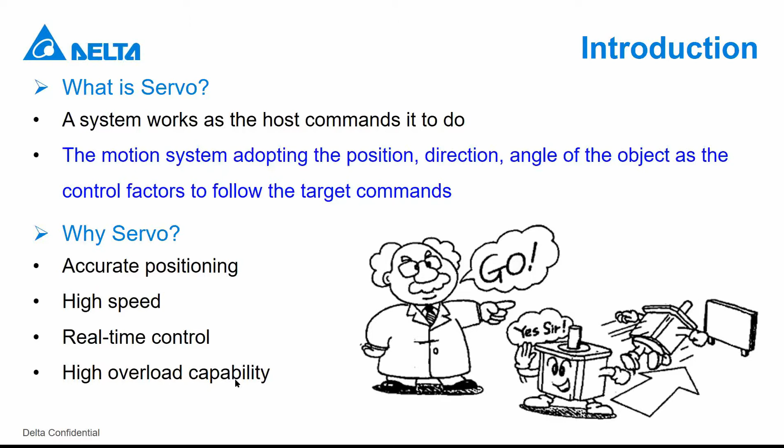Next, let's talk about the system structure inside the servo system. First of all, we need to have a servo drive, and then we need a servo motor with an encoder.

What the encoder works for, I will explain later. But basically, the encoder is a device used to transmit position feedback to the servo drive, so that the servo drive can identify which position the motor is at right now, and see if there's too much deviation that needs to be compensated, or if it's actually following the command quite well and just keep on going.

Then the next thing is that maybe we have something like a gearbox. A gearbox can help to generate more torque. So if we don't want to size up the motor, this could also be an option.

And then what we will also need is some accessories. We will need cables — here we have the encoder cable, which is connected to the encoder, and the power cable, which is connected from the main output of the servo drive to the motor. We will also have connectors for different terminals, for different purposes.

This is a very basic servo system structure. If we want to integrate it with more devices, we can have something like an I/O module, which we can use to wire digital or analog input/output. We can also have regenerative resistors, so that when the motor is braking, or if there's some unexpected high input power, it can be dissipated through this resistor.

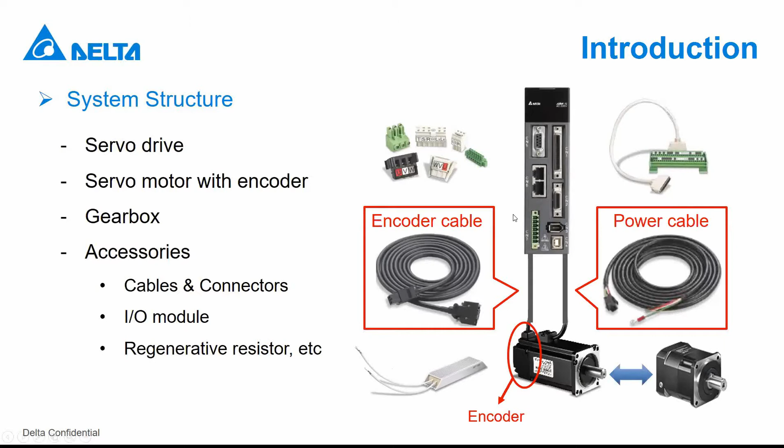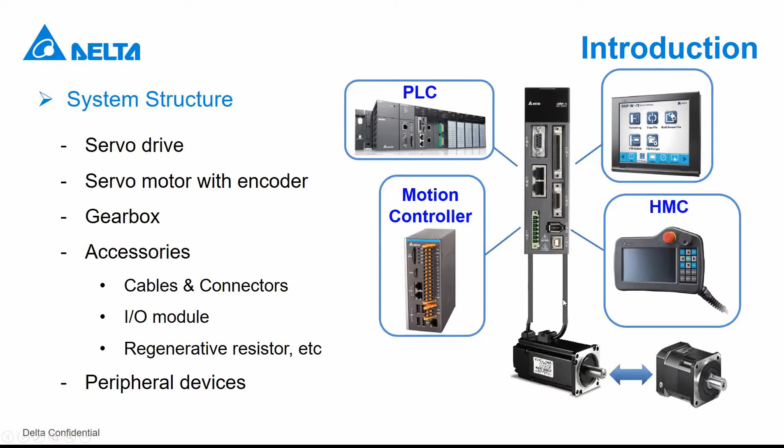With this set, we can move on further to peripheral devices, like connecting it to a PLC or motion controller, HMC — which is a human machine controller — and HMI, which I believe you're all familiar with. These can all be thought of as a host or master, sending commands to the servo drive. In this case, the servo drive works as a slave device — it receives the command and then runs the motor to the right position with the right speed.

If we move one more level further, we can see that we'll have a cabinet that combines all of the devices. Here we have an HMI, some PLC, and Ethernet switches, and they can communicate with the servo drive, sending commands via CANopen, Modbus, or something like EtherNet/IP — these are all possible options.

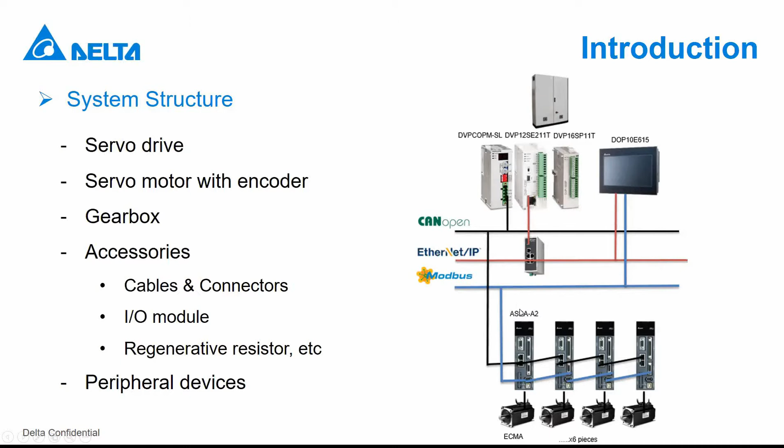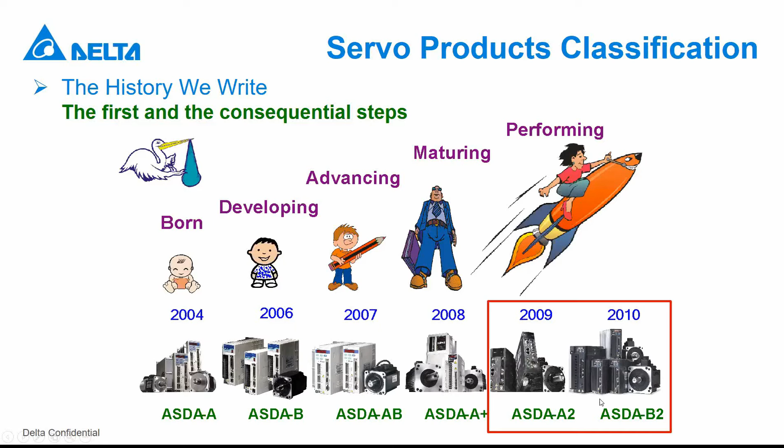So now let's move on to Delta servo products. As you can see, our very first series, ASDA-A, came out in 2004, and we kept on developing new series. Right now, the two series we're promoting are ASDA-A2 and ASDA-B2. This is the product hierarchy that we can see here.

We have a coordinate with the horizontal axis as the encoder resolution and the vertical axis as responsive ability. If we look at the two series we're mainly promoting, we can see that A2 falls in this part and B2 is a little bit lower.

So why do we want to use encoder resolution and responsive ability as the criteria to categorize our servo products? As I mentioned previously, there are two major advantages and purposes we want to achieve with servo products: accurate positioning and high speed.

For accurate positioning, as I mentioned, the encoder is a device used to read the feedback position and send it back to the servo drive. So the resolution of the encoder will directly affect how much and how well we can optimize the position.

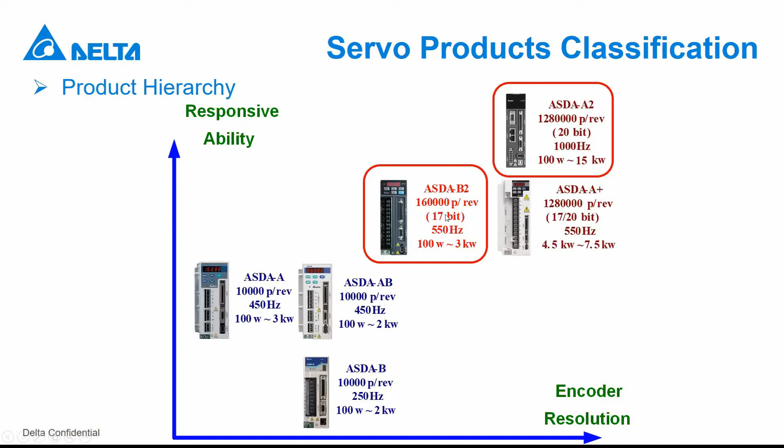As for A2, it supports a higher encoder resolution of 20-bit, and also higher bandwidth, reaching 1 kilohertz. For power ratings, it starts from 100 watts, the same as B2, but it can go up to 15 kilowatts. So basically it can easily be told that A2 is the series that is more advanced than B2.

Let's take a look at this table. This is how we classified our products. Right now, since we're mainly promoting A2 and B2, the rest we're either not promoting or they're already phased out, so we can just focus on these two series.

First of all is the input power. We have two series: 220 volts AC or 380. It's also common to hear people say we have a 200 volt series or 400 volt series, but basically it's the same.

For A2, it supports both input powers. If it's lower than 1.5 kilowatts, single phase or three phases is possible. But if the power rating is equal to or higher than 2 kilowatts, it has to be three phases. This is for 220. But for 380, it's mandatory to have three phases.

Then for encoder resolution, as you know already, it's 20-bit for A2. And for the bandwidth, it can go up to 1 kilohertz.

Then you can see the digital input/output and analog input/output set here, and then the pulse command frequency that the servo drive can identify. For open collector, this is the maximum it can support, and if it's LD, which is line driver, a differential signal, then we see it has a higher data transmission rate.

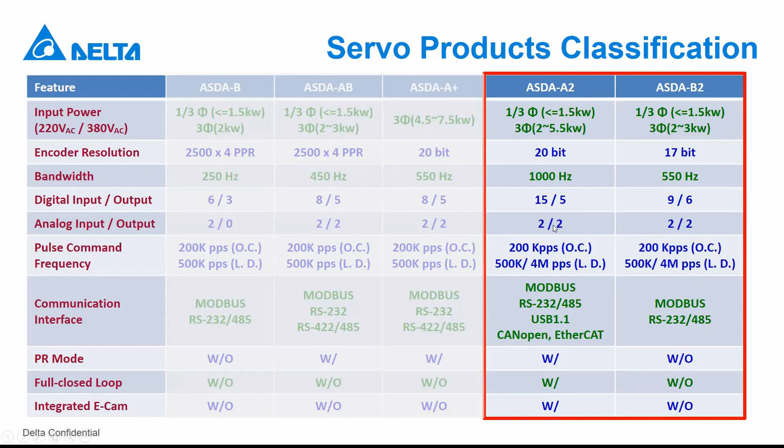As we can see, B2 doesn't come with these three built-in functions. It doesn't have PR mode, there's no full closed loop, and also there's no integrated ECAM in B2. So overall, A2 is the model which is more advanced, having more functions than B2. The next thing is what we can say is the major difference between A2 and B2.

The difference is that one has built-in motion function while the other doesn't. This one is B2. For B2, we need a higher level host controller, because the host controller needs to give it the sequence, tell the servo drive when it should execute which command, and also needs to create and program the command, so the servo drive can identify which profile it should carry out. All the motion and sequential commands need to come from the host controller. But what about A2?

For A2, because A2 itself has the capability to program different kinds of profile commands, even when we need a host controller, it just needs to switch between different commands to tell A2 which one to execute, and that will be enough. So only a lower level host controller is enough, because even if the host controller is not able to provide the profile command for A2 to execute, A2 is still able to program by itself. So the critical commands generated in the servo drive can be handled by itself, and this will improve the performance for the whole system.

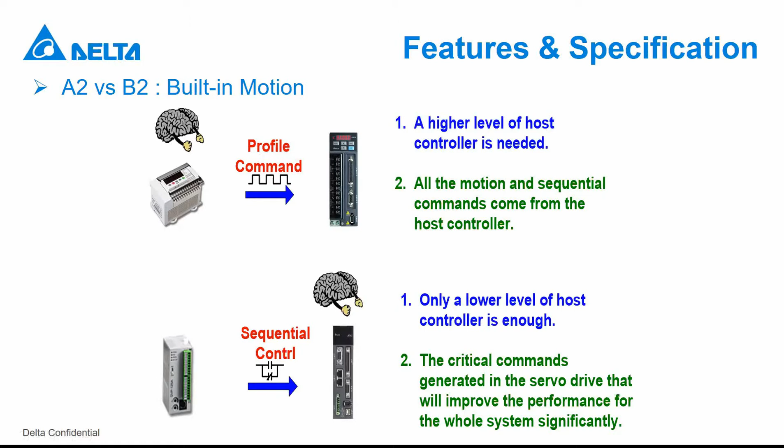Now let's talk about the main features of A2. The encoder resolution can reach 20 bits. It supports communication protocols like CANopen, DMCnet, and EtherCAT. CANopen and EtherCAT, I believe everyone is very familiar with, it's a very common and popular field bus protocol. What is DMCnet? DMCnet is a protocol developed by Delta itself, called the Delta Motion Control Network. Its transmission rate falls into the middle, but here we're mainly promoting the CANopen and EtherCAT type, which I will also mention later.

For A2, some specific models like A2U and A2E have extension digital inputs, so in total we can have 14 inputs. A2 comes with built-in motion function, also ECAM, and it can provide gantry control. The bandwidth can go up to 1 kilohertz, and we have some filters that help with resonance suppression using notch filters. We also have additional functions like friction compensation and bumping protection to optimize system behavior. We also have different operating modes, which we can briefly categorize into position, speed, and torque. Full closed loop control is another built-in function for A2.

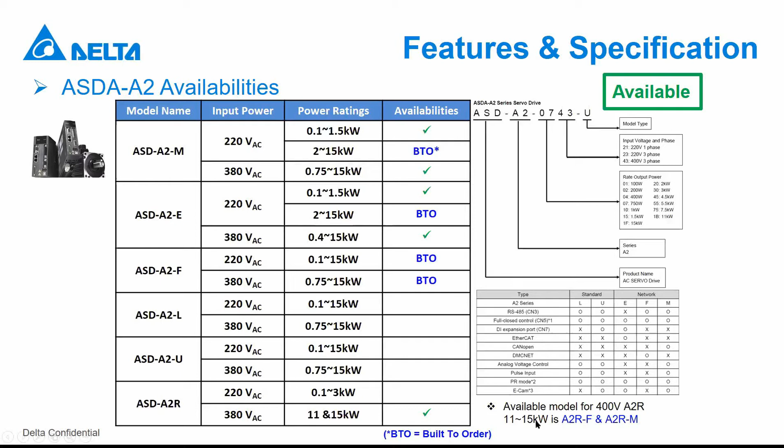Just one remark to let everyone know: as I mentioned, we have higher power ratings up to 15 kilowatts for A2. However, what we have is the ASD A2R, 11 or 15 kilowatts, not ASD A2. As you can see here, available model for 400 volts, A2R 11 and 15 kilowatts is A2R-F and A2R-M.

And then it's the rated output. And then a very important piece of info, which is the firmware version. Because for different models, like A2M, A2E, we have different firmware.

For different firmware, it means there are probably some different parameter configurations or settings. Sometimes when we encounter a problem in a certain model, it doesn't necessarily mean it will also happen in other models. If users encounter a problem but don't specify which model name it is, they only say 'I have a problem with A2' without specifying if it's A2M or A2E, then it could lead to misunderstanding because we don't know which firmware version you're talking about.

It will also cost time to communicate with users to understand the details, and that time consumed will not be efficient. So it's very important to know exactly which model name it is and which firmware version. The next one will be the serial number.

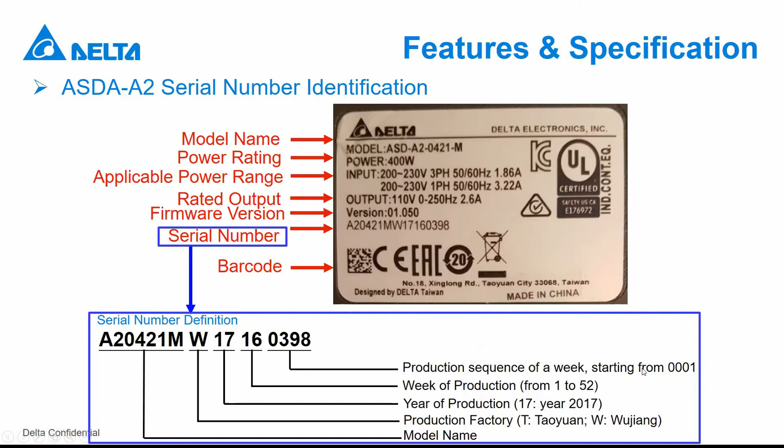CN2 is the connection terminal for the main encoder, and CN3 is for Modbus. For the last CN4, it's a USB to connect it to the PC, to use software to configure it. CN5 is another connector for the encoder. But why do we need two encoders? This is for the full closed loop, and I'll explain later.

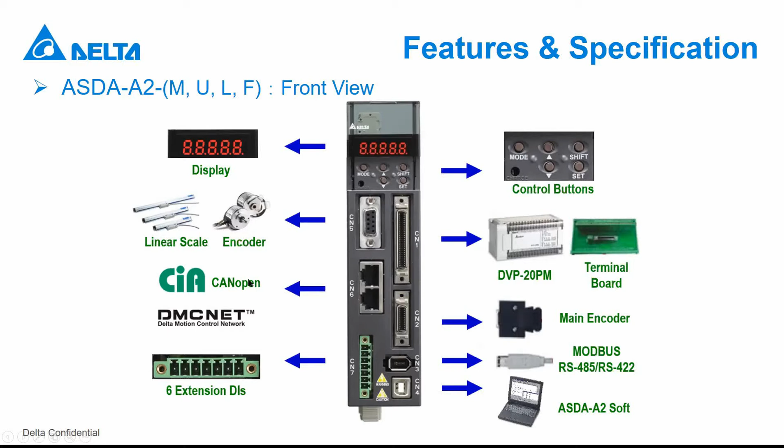For CN6, this is the communication port, so it could be either CANopen or DMCNET. The last one is the extension digital inputs, but as I mentioned, it's only limited to certain models.

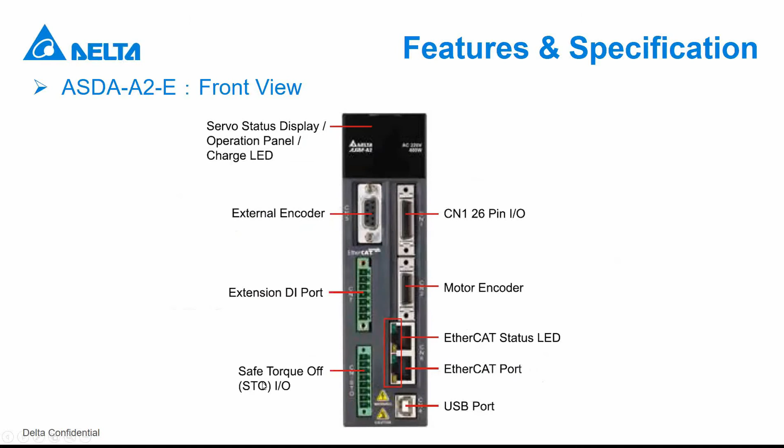If users want a servo drive with safety function, then for now their only option will be A2E. It's not possible to use A2M or other models to achieve that. Only A2E is possible to have the STO function.

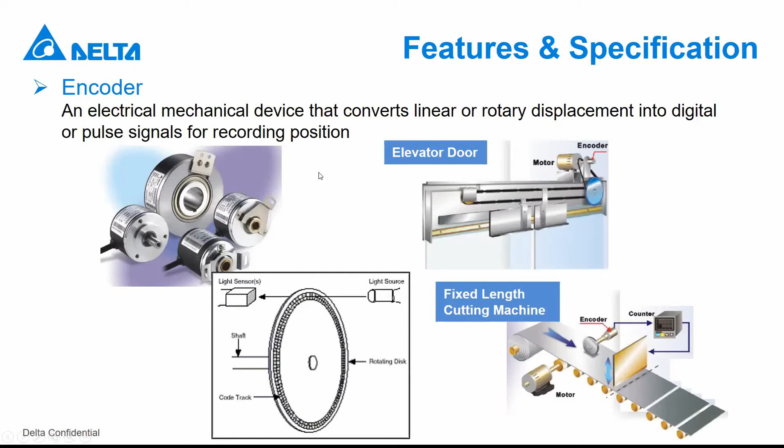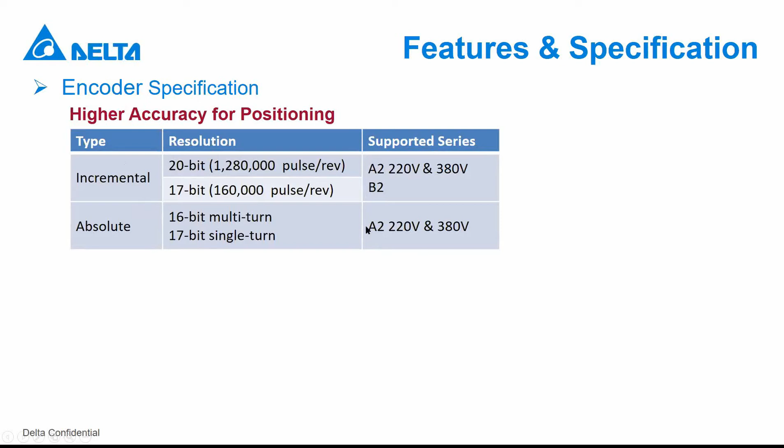So what is an absolute encoder? An absolute encoder is basically a kind of encoder that uses batteries to keep the feedback position from being lost due to power loss. As mentioned before, the encoder is a device that helps the servo drive understand which position it is. It can establish a coordinate and keep the record of the position.

However, this is only valid when the servo drive is in the power-on status. When the power is off and on again, basically the coordinate is lost and needs to be established again. There are tons of applications where this is not really acceptable, needing to reestablish the coordinate every time the power is on.

So in this case, what users can consider is using an absolute encoder. Because we have an additional battery, even when the servo drive is powered off, the position and coordinate can still be recorded with the help of this battery, so we don't have to do what we call homing to establish the coordinate again every time we power on. So this could be a very convenient selection, but it only supports A2.

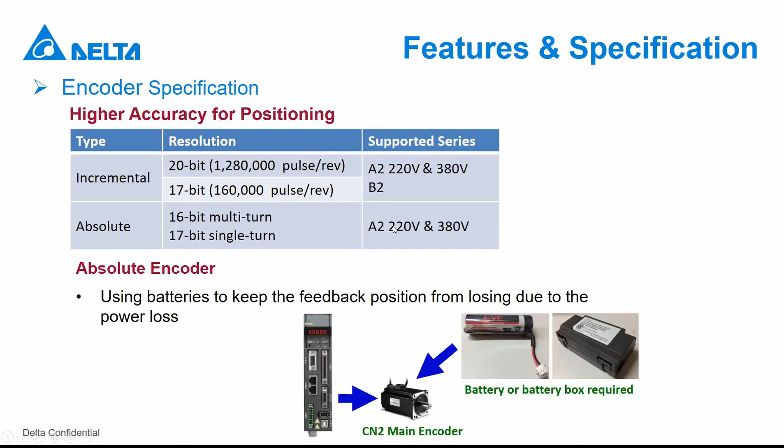For field bus, we support CANopen. Just so everyone knows, CANopen is a very common protocol, which we call DS301 or DS402, or you may hear people say CiA301 and CiA402. However, DMCnet, as mentioned, is a protocol developed by Delta ourselves, and it only complies with DS301, not DS402. So if there are requirements for CANopen with DS402, then we can only support and promote the A2M, not other products.

We also support EtherCAT, as mentioned, which is A2E, the EtherCAT type. It also supports the modes of DS402. What needs to be noted is that what we support is CoE, CANopen over EtherCAT, not SoE, not servo over EtherCAT. It's different stuff.

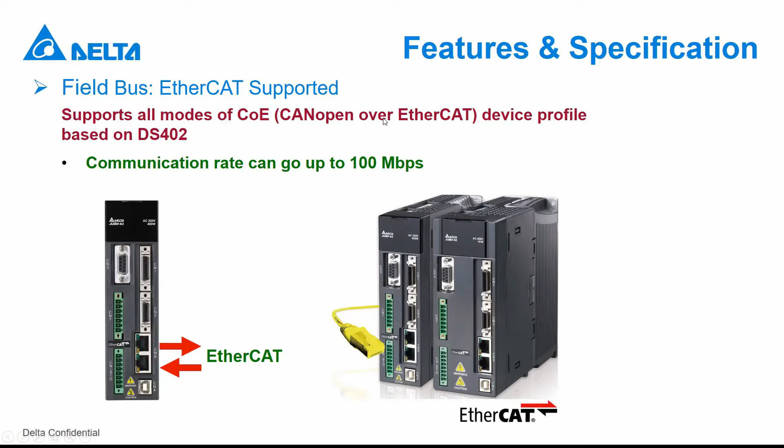Next is the model name explanation. It's very similar to A2, so I will not go through it in detail. We can see it starts with ASD, then model name, power ratings, input voltage and phases, and then the model type.

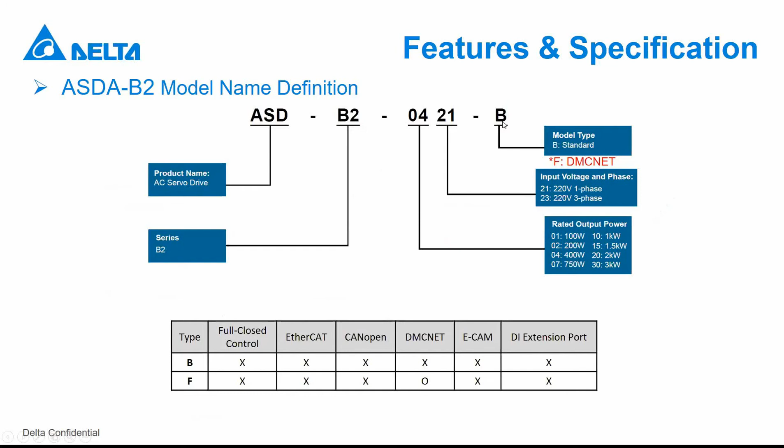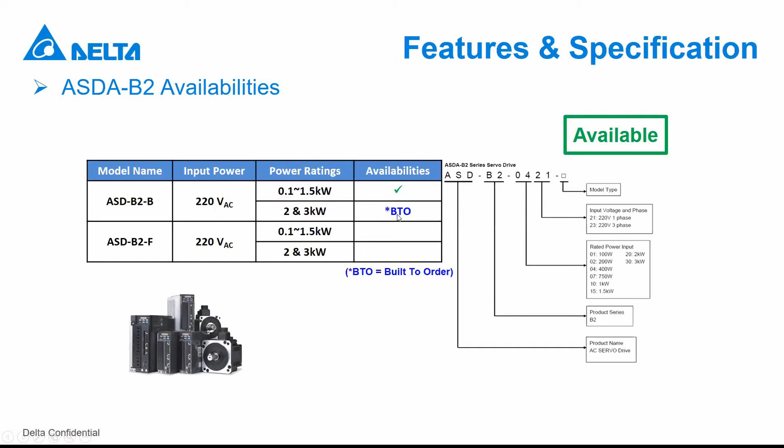Next is B2 availability, as you can see here. What we mainly promote is the B2B, the very basic model. For 220 volts, from 100 watts to 1.5 kilowatts, we keep it available in stock. However, for 2 kilowatts and 3 kilowatts, since the power input is mandatory 3 phase, we keep it as a BTO, build to order product.

After going through the servo drives, we'll have a quick look at the servo motor. For servo motor, we also have different input power, and it needs to match with the servo drive. It's not possible to use a 380 servo drive with a 220 servo motor, and likewise, it's not possible to use a 220 servo drive with a 380 servo motor. It needs to be the same power input.

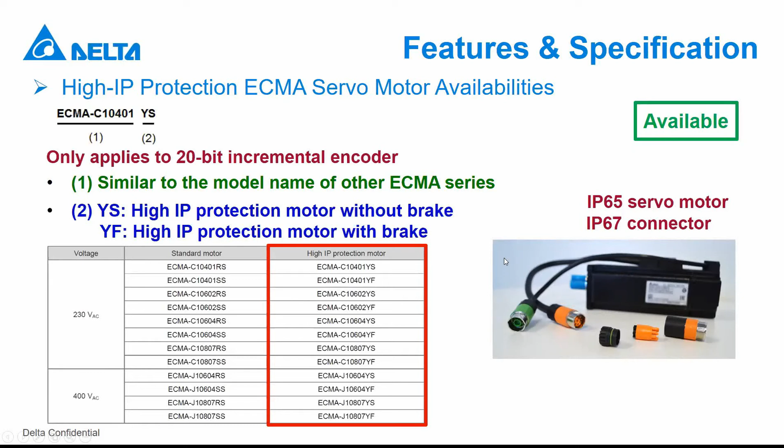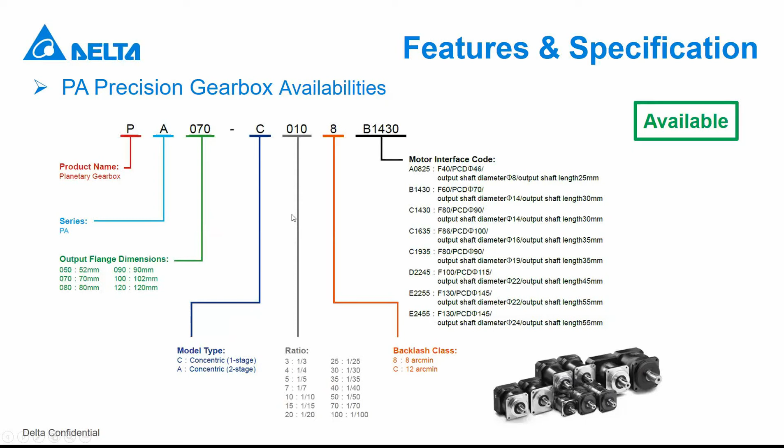We also have some gearboxes. I will not go through the specs one by one, just to let you know that we have one which is the PA precision, and we also have the other one as the PS. You can see for the ratio, so PS and PA have some differences, and you can look at the detail in the catalog if you're interested.

Now here is another topic worth mentioning - what should we do if there is a request from certain users that they want to fix the Delta servo product which is already phased out, or want to replace it. First of all, here are some series that we already phased out: A plus, A, AB, and B. These are all series that we don't have stock for and have no replacement for. So what can we do? We can only suggest them to change the servo set to A2 or B2.

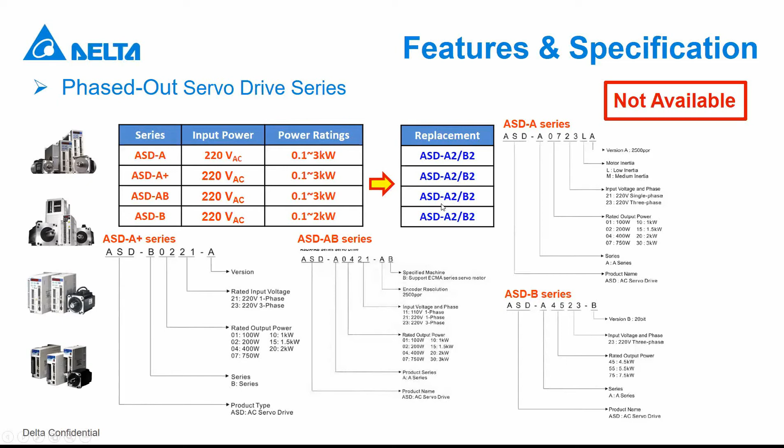We also have the phased out servo motor. What we have now is the ECMA series, but what we don't have now is the ASMT series. So we will suggest using the ECMA servo motor as a replacement for it.

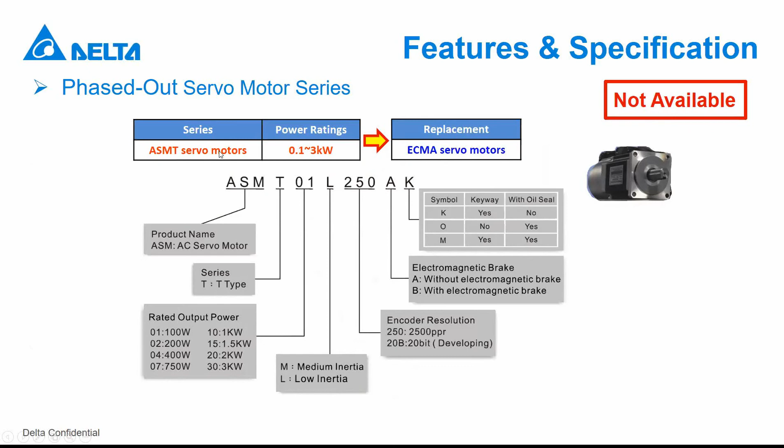Okay, and then it's the compatibilities. It's important to know which servo motor can work with which servo drive, and how do we tell it? We need to check the encoder type, which type they support.

So in this case, it's not possible to use an ECMA servo motor to work with these servo drives. But if it's A2, B2, or another model that we're not promoting but is also an existing model, which we call the M series, it's completely okay with them to work with the motor with these encoders.

So here comes another question: now we know that A2 can support 20-bit encoder resolution, while B2 supports 17-bit encoder resolution. So what will be the final resolution if we use A2 with a 17-bit encoder motor, and instead use B2, which only has 17-bit encoder resolution, and have it work with a motor with 20-bit resolution encoder? What will happen?

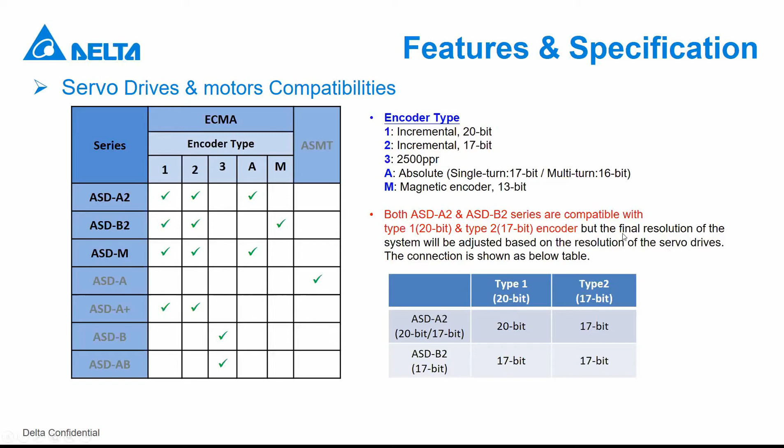But if we always let the resolution follow the servo drive but not the motor, then we can always make sure that no matter which motor we change, the command is always within our control. So this is very important, and this is the reason we designed it like this.

Okay, still has time, so let's go through this quickly. Now we'll move on to the section for some specs regarding servo drives.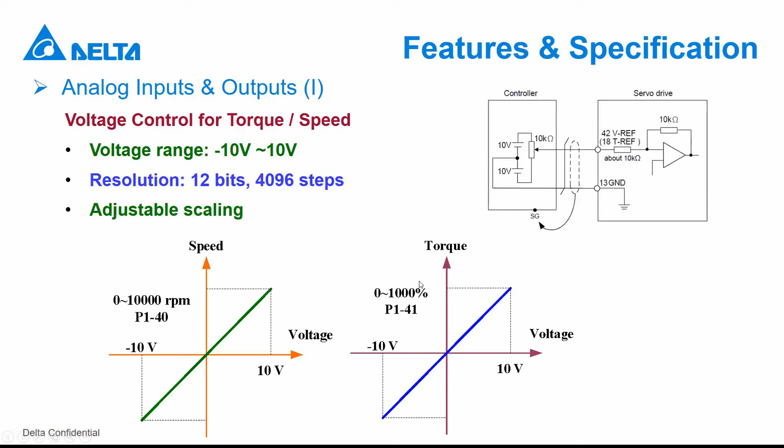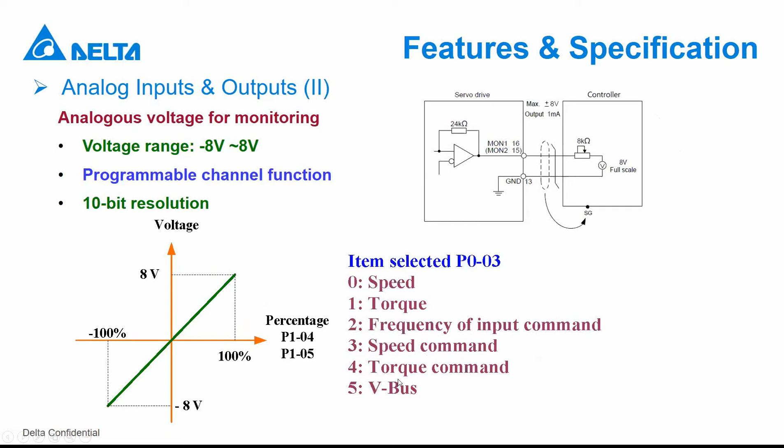Also, we can output an analog voltage for monitoring. The range is from -8 volts to +8 volts, with a 10-bit resolution. Here are some variables that we can monitor via analog output.

Now some additional functions. For this bumping protection, this is basically to prevent the mechanism from trying to keep going when it reaches a certain stopper. We can set the level of the bumping force and the threshold of the bumping time. So when this ball screw hits the stopper and keeps generating force defined by P1-57, exceeding the time defined by P1-58, it will generate an alarm to indicate there's something wrong with the application.

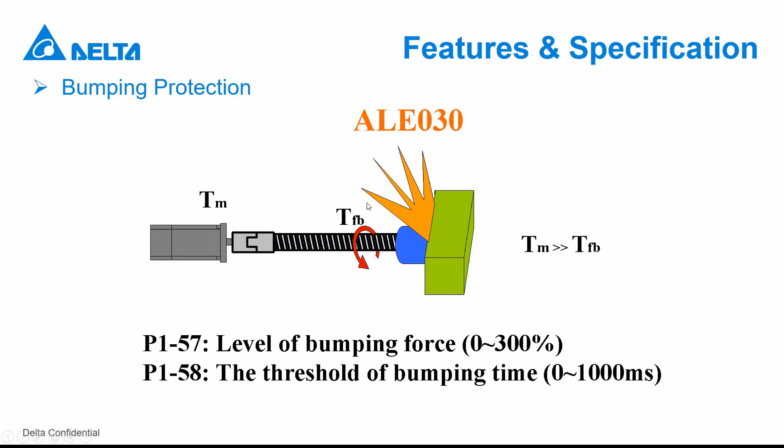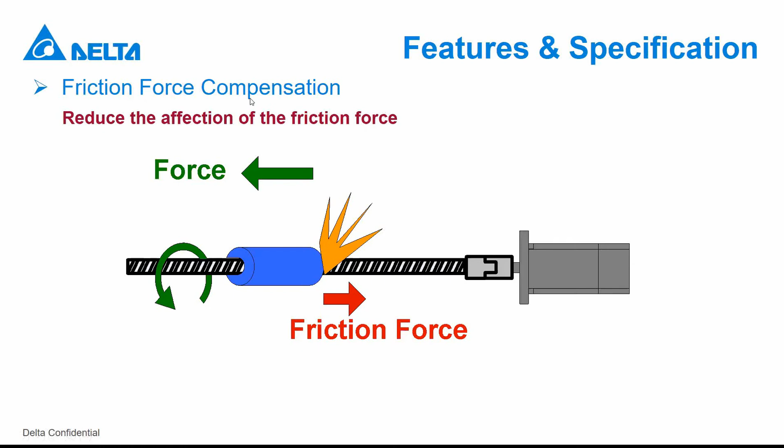What we also have is friction force compensation. With this force added, when the object wants to start from standing still to moving, the effect will be less and it will also move faster.

For this slide, this is talking about the suppression capability. The first one is resonance suppression. We have 3 sets of notch filters to suppress the resonant frequency. As you can see here, if the signal is without applying a notch filter, there is quite some vibration, not stable. But if we add the notch filter, the spikes are way less, and the performance will be better.

What we also have is low frequency suppression, but this is only for A2, not B2. We have 2 sets. So what we have is that if we have a mechanism like this, going left and right at very high speed...

Because the load at the front end is heavy, inevitably when it's moving this arm will start to shake drastically. But if we apply this low frequency suppression, we can make sure that this whole arm, including the load, is connected really well internally, so that when it's moving fast, this arm will not just keep shaking, but will actually hold still and move as one.

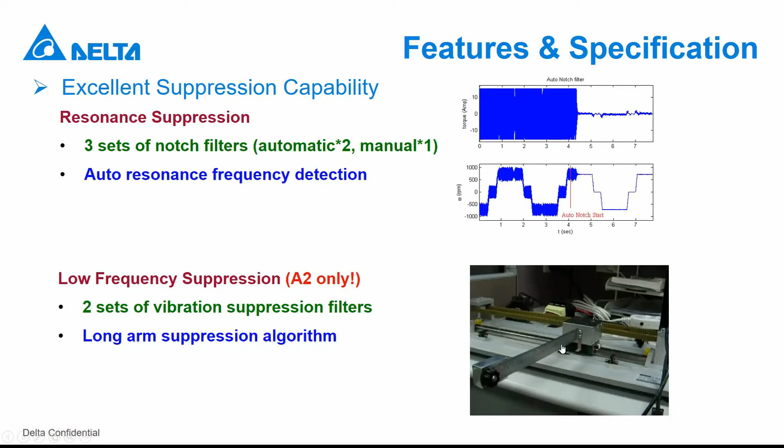The next one is the full closed loop system, which is A2 only. Besides the CN2 for the main encoder from the motor, we also have a terminal, CN5, for connecting to another encoder. The reason is that for a certain application or mechanism, like a belt, it's not that rigid, so the actual mechanical position might be different from the position of the motor. If the servo drive doesn't know the deviation, it will not be able to fix and compensate it.

Eventually the deviation will be more and more, and there might be an alarm. So besides the main encoder, we add an auxiliary encoder at the end of the mechanism, and wire it back to the servo drive, so that once we activate this full closed loop function, it will calculate the difference between the main feedback and the actual feedback, and see how much it should compensate — whether it should go a little faster or slower. This is what we call full closed loop. The purpose is to reduce the impact of the backlash and insufficient rigidness of the mechanism, and ensure the accuracy of positioning.

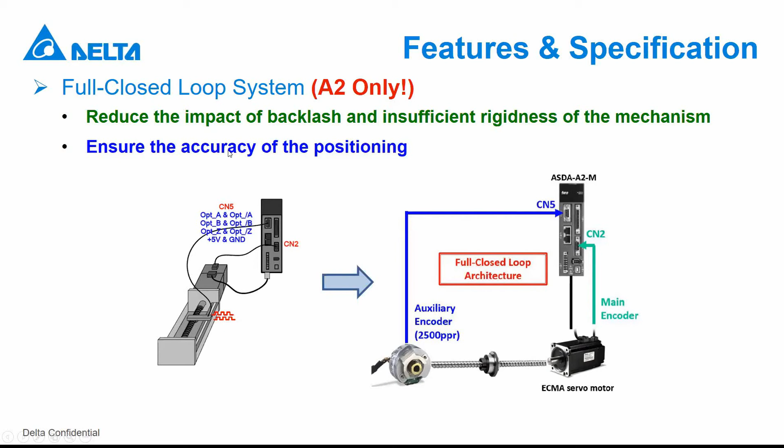This one, versatile PR mode, is for A2 only. As mentioned before, A2 has a built-in motion function, so we don't have to have a higher level host controller — we can even discard the host controller. But we can still program several different motion profiles inside A2. With this PR mode — PR stands for position register — it means that without a host controller, our servo drive can still complete a complicated motion profile.

We have 64 procedures that can be applied, and 35 homing modes, almost all complying with the homing method defined by DS402. It's easy, and we have different options for it — not only can we move it point to point, position to position, or run it at constant speed, but we can also use this PR mode to change the parameters.

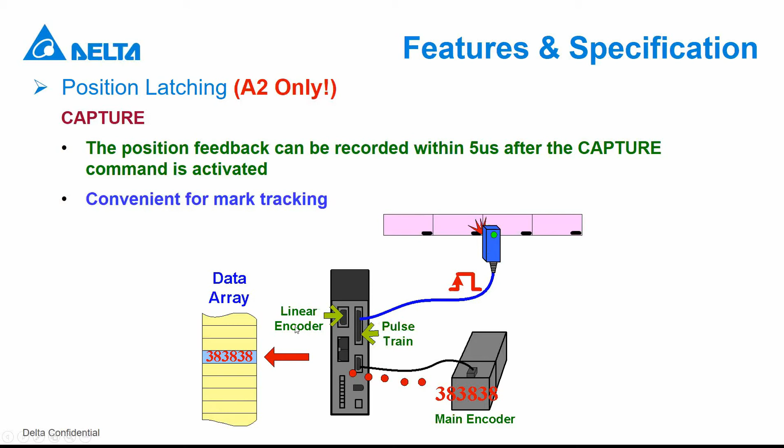Also for A2, we have the position latching function — this is capture. We can use a high-speed digital input to make sure that every time this digital input is triggered, the position can be captured. And also we have position detection.

This is what we call compare. First we define a value for it and let the servo drive start getting readings from the encoder. Once it reaches or exceeds this defined data, it will output a signal, and we can use it to proceed to the following command. This can be combined with the masking function, especially for packaging applications.

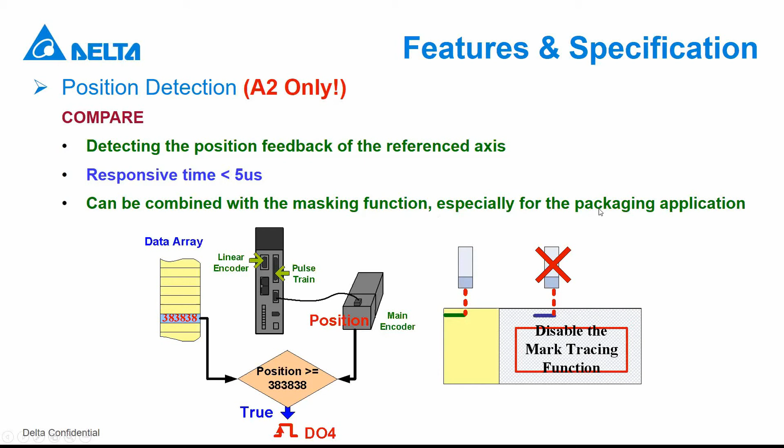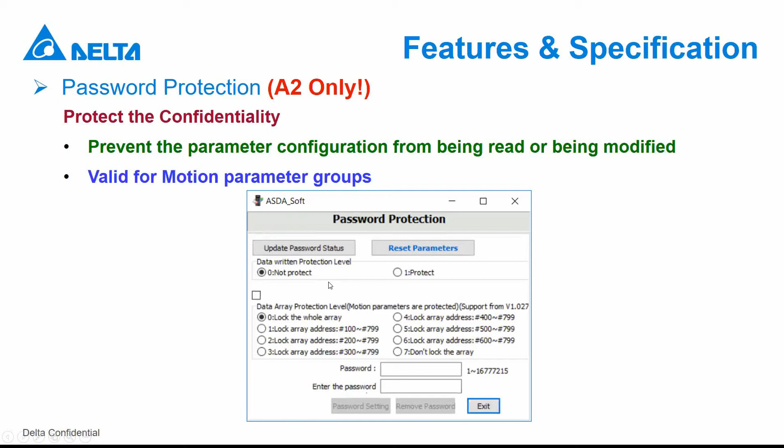So you can see that we have the data array. This is mainly for keeping the motion profile, like an eCam profile or other profile.

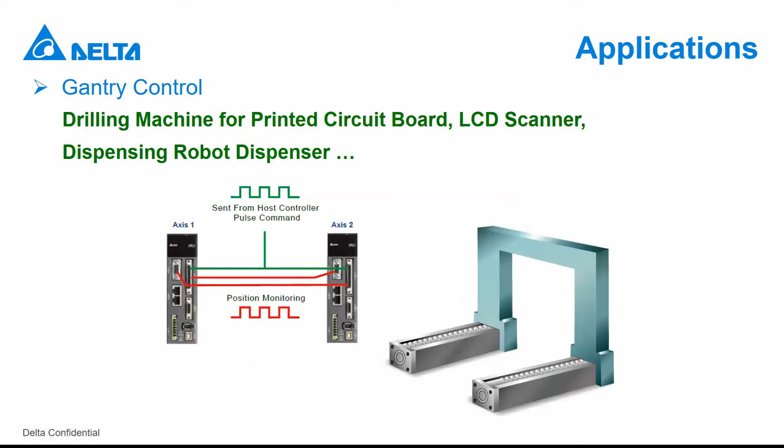Then the last part will be some applications that could be done, or have already been done quite a lot, with Delta servo systems. The first one is gantry control. Then also it's a very typical one like the packaging machine. And also something like the flying shear, like a tube cutting, where the cutter, when it reaches a certain part, starts to cut.

Because this conveyor belt object is kept moving by the main axis, it's very important that while this cutter is cutting on the object, this axis needs to also keep moving at the same speed as the main axis. Otherwise, the cutter will be damaged. So in this case, it's very important to make sure the position synchronization is very accurate.

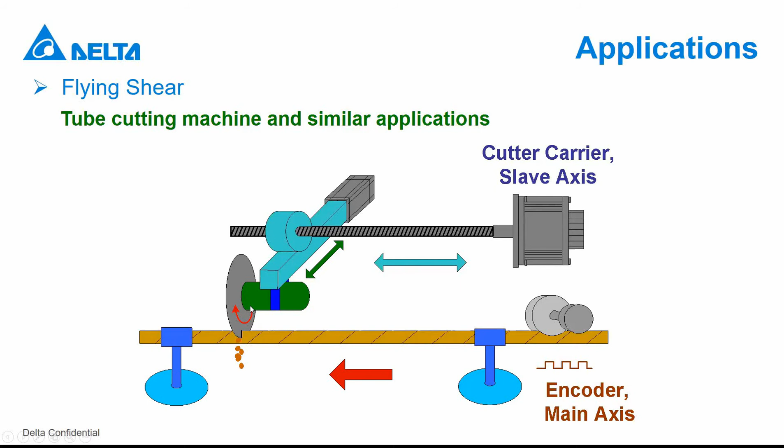And then it's the filling machine, which shares the same operating principle as the flying shear. Basically, when the tube reaches the right spot, you need to lower it down to inject the liquid. It needs to move together with the bottle, then go up, go back, and start the next cycle.

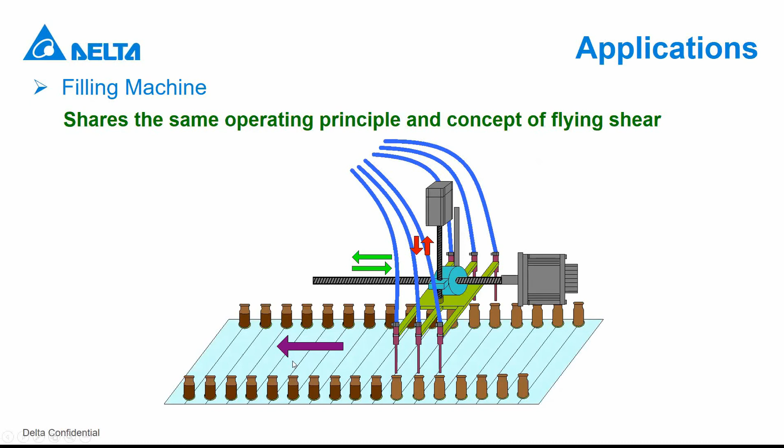And also we have a typical one, the labeling machine, which shares the same concept. And then there's an application that is very common.

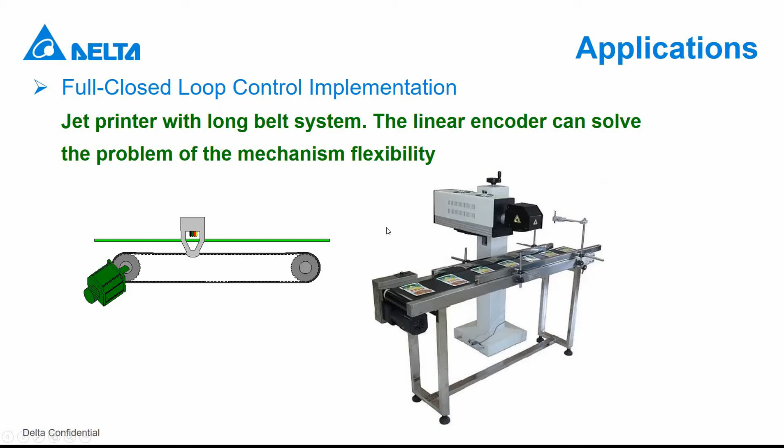And also another application that can be done with eCam is the winding machine. As I mentioned earlier, right now Delta servo drives can only work with Delta servo motors.

So it means users might have some questions when it comes to selecting products - for which motor should I choose which drive, or for which drive should I choose which motor, and what is the cable if I only want to order the connector and make the cables myself, then what will be the model name?

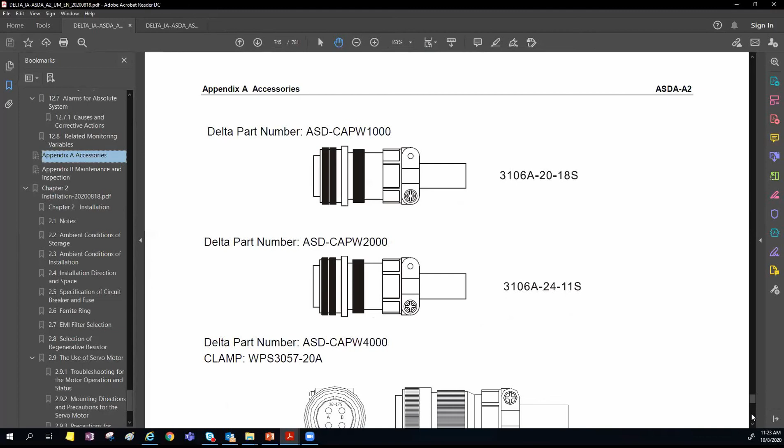In this case, if you have the user manual, which you can download from the link sent to you earlier, you can find the appendix here. In Appendix A, this is accessories that you can order, including connectors - power connectors, plastic type, military type - the cables, the cables with the connector, and also encoder connectors for plastic and military, and encoder cables for absolute type and also incremental.

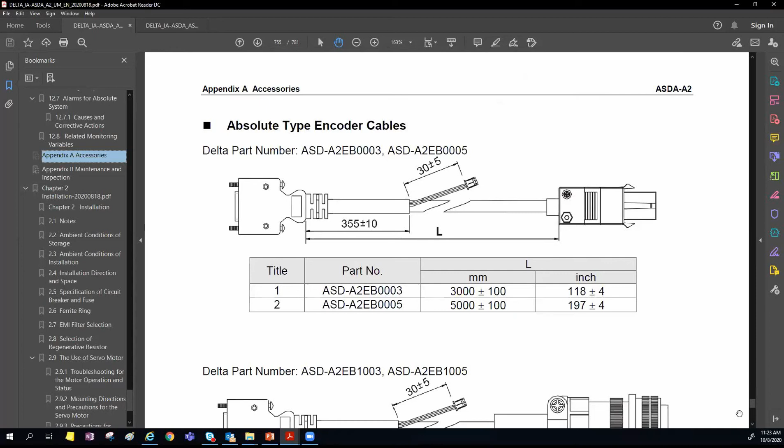But as I mentioned, there are a lot of things, and how can we know if we need the encoder connectors or power cables with plastic or military? In this case, you may refer to also what's here in Appendix A. You can find the information starting from page 761. Here what we have is the combination table of the product selection.

As you can see, we have matched the servo drive. We have the servo drive and the motor combination. In this case, we not only list down the model name of the servo drive and the motor for you, you only need to choose which model - maybe I want to have CANopen, then here will be M, if it's EtherCAT, it will be E. And here, if I want a motor without mechanical brake, I choose R, if it's with brake, I choose S.

Not only can you know the servo drive and motor model name, but you can also choose, if you want the motor power cable without brake, this will be the model name. But if you only want the connector to build your own cable, then this will be the option for you.

The same for the power cable with brake, power connector with brake, or you can choose for encoder, the incremental type or the absolute type. Or if you want to make your own cable, you can just order the encoder connector. So here with this X, it means the length that you can order, 3 means 3 meters and 5 means 5 meters.

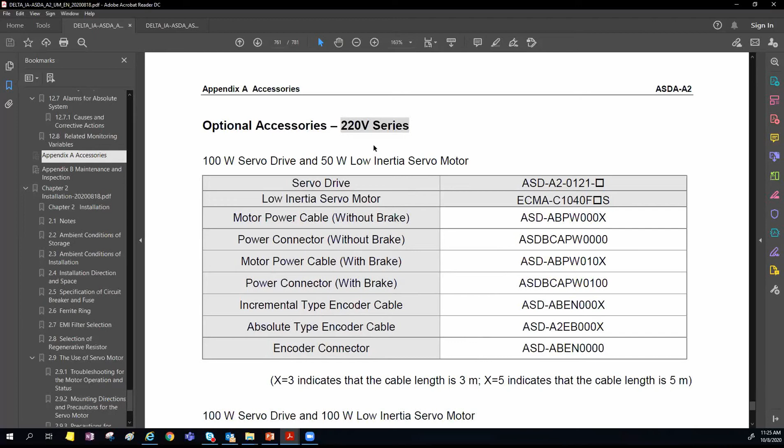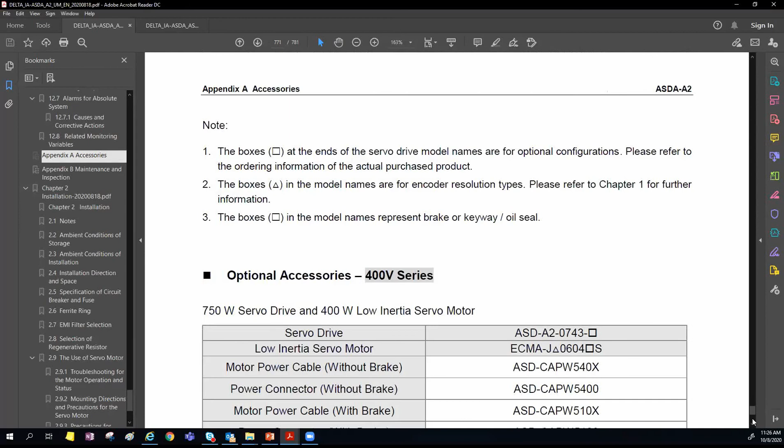So we have it not only for 220 volts, and you can see that we covered almost all of the power ratings, and we also have the combinations of the 400 volts series. So in case there are some questions about how to select the right servo drive, motors, or cables and accessories, you may always refer to this to get some idea.

That's about it. Next will be some hands-on practice, an ASDA-Soft demonstration. So please open ASDA-Soft. Once you open ASDA-Soft, you will see a window like this.

If you have already connected the servo drive to your PC with the USB cable, just click on Start Auto Detect, and then it will show auto detection success. Then you can click on OK.

For ASDA-Soft, the first thing we will do is get the parameter configuration. First please click on this icon, here this green one, with a white P inside. This is the parameter editor, so please click on it.

Once you click on it, it will show the default parameter configuration. Inside the servo drive, we have different parameter groups, starting from P0 to P7, and you can find all of the definitions inside the user manual.

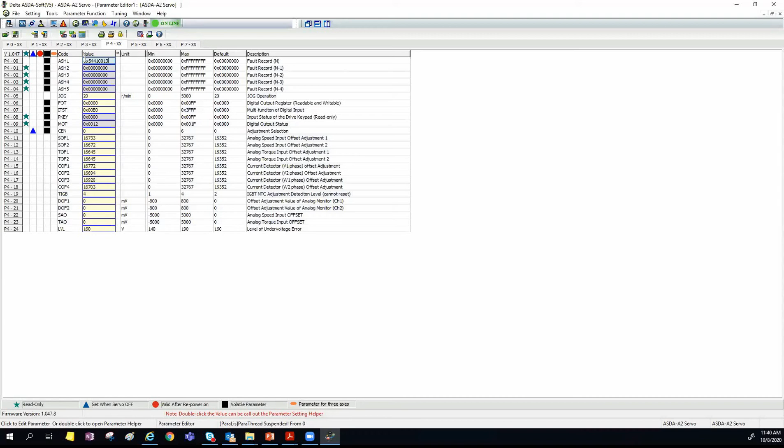What we can check next is how long the servo drive has been working, because we need to know if the issue happened as soon as it powered on, or after working for a long time. What we can check here is P0-08, the servo startup time. You can see that my servo has started up for 42 hours, but this only indicates the time since it was powered on.

So here are some basic info. Now what we need to do is try to run the servo drive and the motor. I think you can see the demo kit that I have now.

As you can see now, what I have is AL013, alarm 13. So whenever there's an alarm displayed on the servo drive, we need to disable it. So how do we know what this alarm is about and how do we correct it?

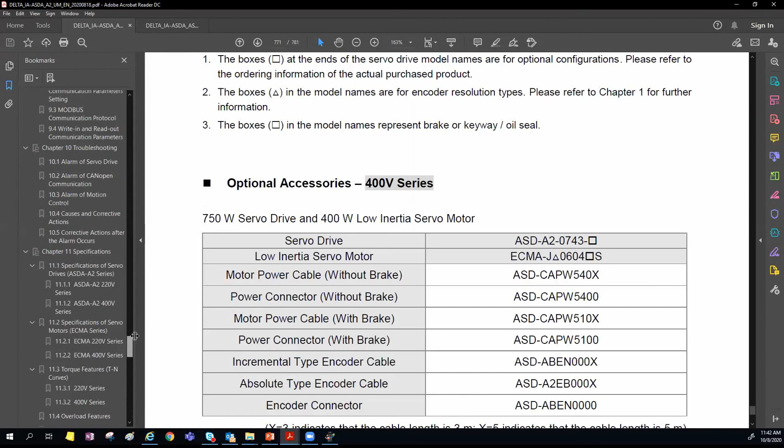In this case, what we need to do is refer to the user manual. If we have a look at the user manual, we go to chapter 10, and there you will see the troubleshooting part. First thing is we need to go through alarm 13.

Alarm 13 means that the emergency stop button is pressed, so we need to disable it. But just for information, right now there's no physical wired digital input in my servo drive. However, there's still the alarm because this is the default setting of every servo drive.

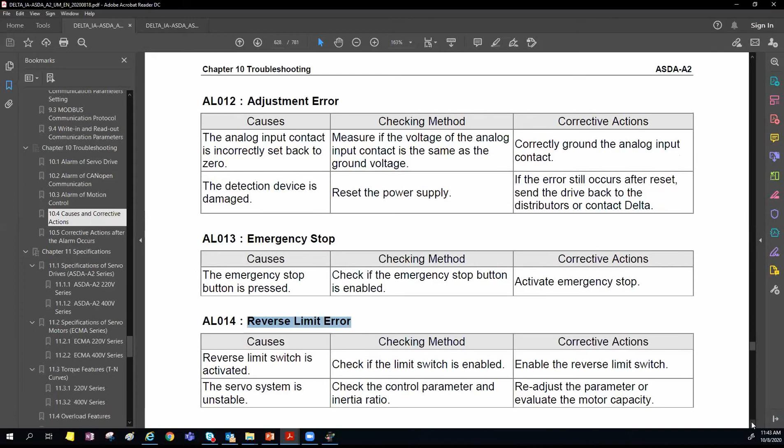We make emergency stop, reverse limit, and also forward limit as B contact, because normally this is how these sensors should be wired - they should be B contact, not A contact. But now we're just doing an internal test, we don't need it, so we need to disable it.

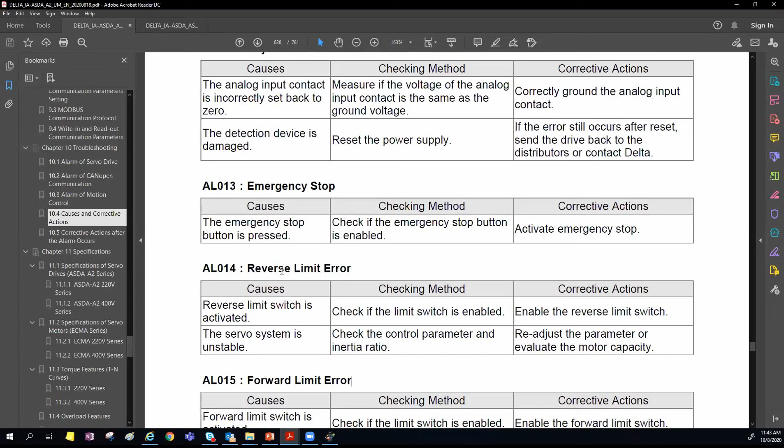So how do we disable it? Right now what we have is 3 digital inputs being set as emergency stop, reverse limit, and forward limit, and they're set as B contact. That's why the servo drive thought these are all triggered, and therefore it's not possible to move it. So what we need to do is disable it.

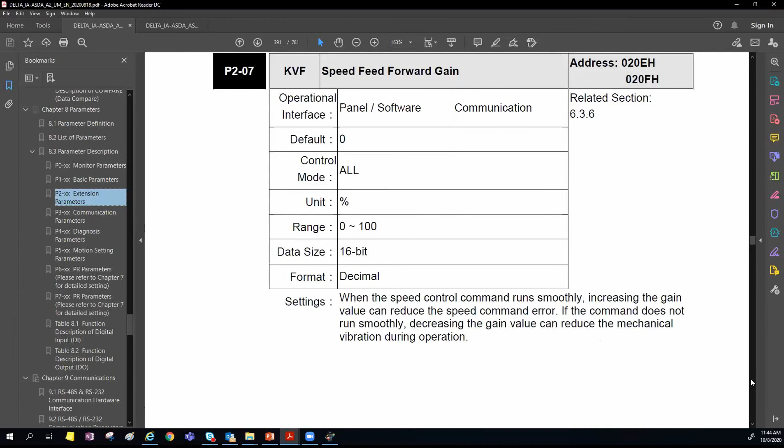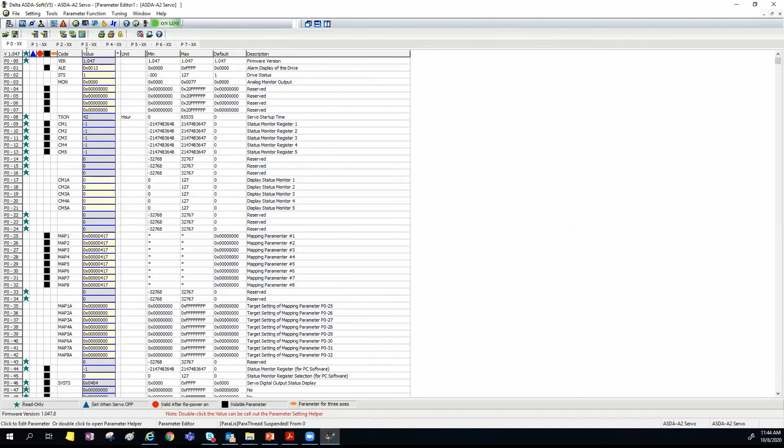So we can move on to further testing. We have some digital inputs that we need to disable, and the digital inputs, in the user manual, you can find that it starts from P2-10. If you have the user manual open, you can find it on page 390. As we go back to the ASDA software, you can see that starting from P2-10 we have the digital inputs 1 to 8, and these are the codes that we can change.

As I mentioned, we can assign different functions for it. And how do we know which function it is? This is something we can refer to in the table inside chapter 8 - table 8.1, page 576. You can find the function description of digital input there.

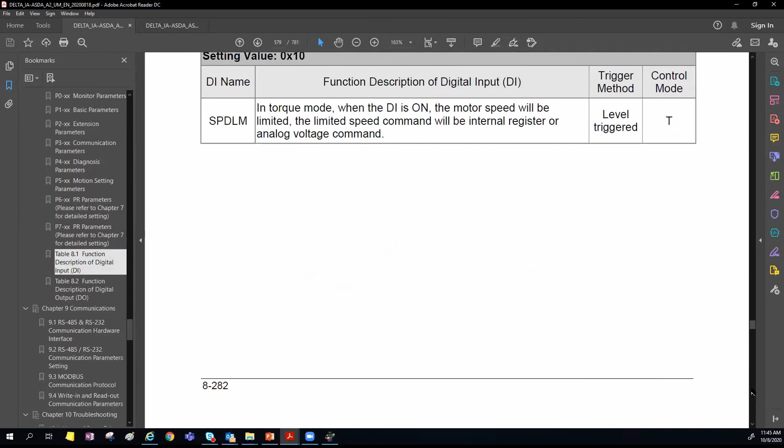Right now what we need to do is find which digital input is set as emergency stop button, reverse, and forward limit, and disable it. So in this case, those 3 are here.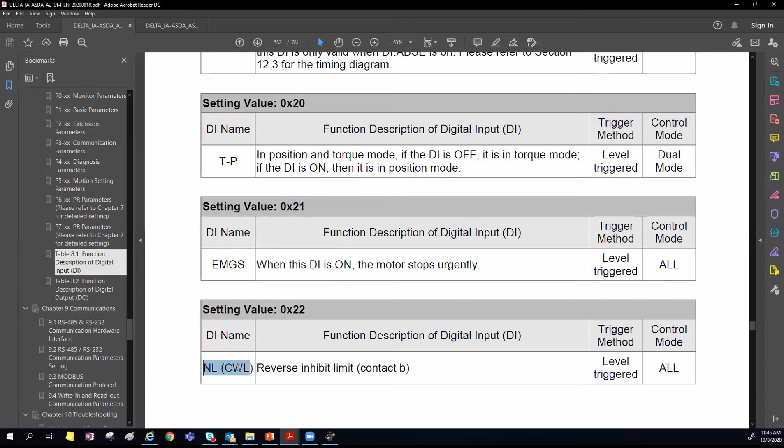So for emergency stop, the value is 21. For reverse limit it's 22, and for forward limit it's 23. So it means we need to find 3 digital inputs, and 3 of them are assigned as 21, 22, and 23, and we need to disable them.

So let's have a look. We started from P2-10, and then go down to P2-17, and we can see that P2-15, P2-16, and P2-17 are set as these 3.

And if you still remember, the Z bit is the one we can set as A contact or B contact. As you can see now, they are all in B contact, but I want to change it to A contact. So I just change this to 1.

Press enter. And in the meantime you can also have a look at the display on your servo drive, and you might see the changes. So now if I change this to 121, you should be able to see that there's no more alarm showing on your servo drive. Let me also show it to you.

So now you should be able to see that here, there's no more alarm. But if I set it back, it will show the alarm again.

So for example, if I now set this to B contact again, you'll see that there's an alarm appearing again. And if I set it back, then there's no more alarm.

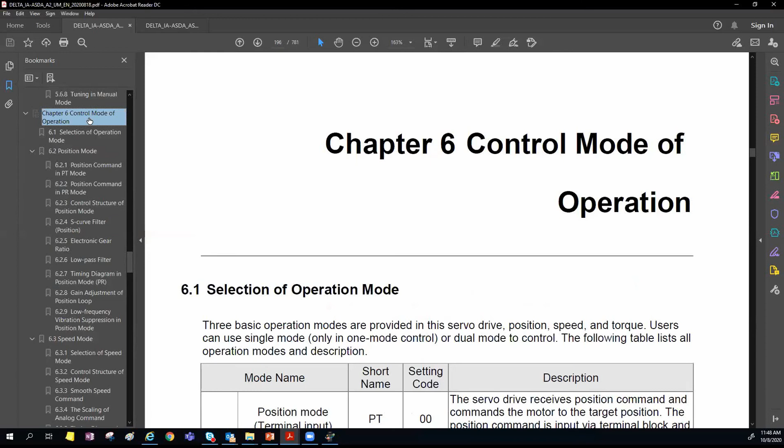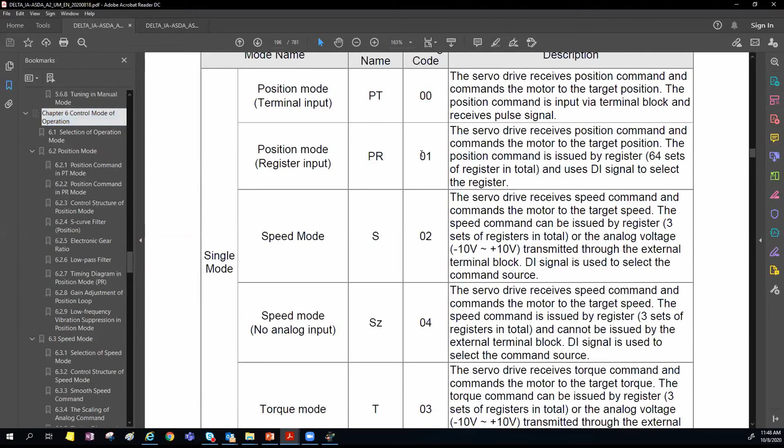For that, you can see if we go to chapter 6 here, we have the control mode of operation. We can see we have different modes, and we can categorize them as position, torque, and speed. This is the different code for it: 0, 0, 1, 0, 2. And we also have one for communication - CANopen or EtherCAT.

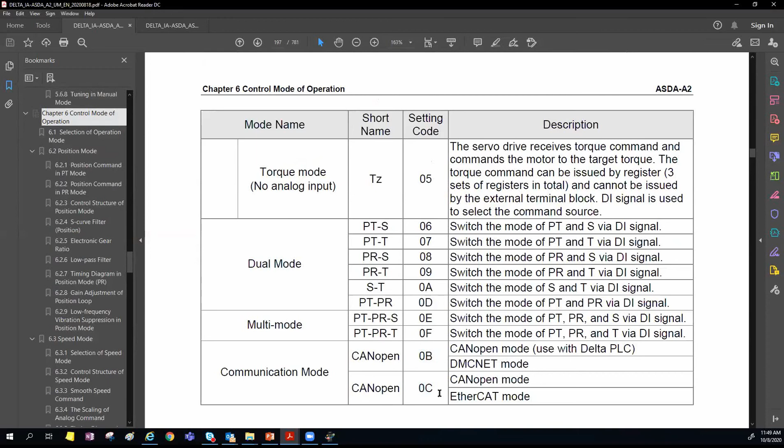For demonstration, I will set the operating mode into speed mode without analog input. Then I will define 2 internal digital inputs to work as a switch. With 2 digital switches, I have 1,0 / 0,1 / 1,1 and 0,0 which is both disabled - I have 3 statuses. With 3 statuses, I can set 3 sets of the speed command. Then I want to trigger these 2 digital inputs to see if the motor will work accordingly with the set speed command.

So first, what I need to do is change the operating mode. The operating mode here is P1-01 - input setting of control and control command. So first I will need to set it to 4.

If I set it to 4, you can see it says please restart the servo to enable new setting. It's because all these parameters inside the servo drive have different types, and different types have different icons in front. Here you can see whether it's read-only, can only be set when servo is off, valid after repower on, volatile, or maybe it's a parameter for 3-axis which is not for A2M.

So in this case, I need to repower on. Once I set it to 4, you should be able to hear the sound of my switch. Please power off, and power on the servo drive again.

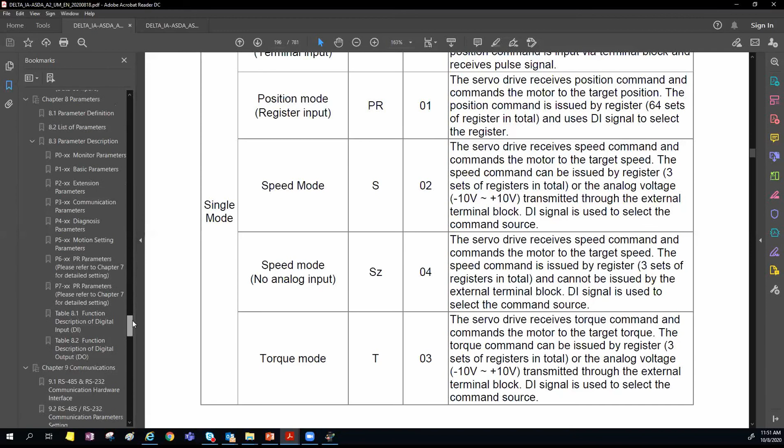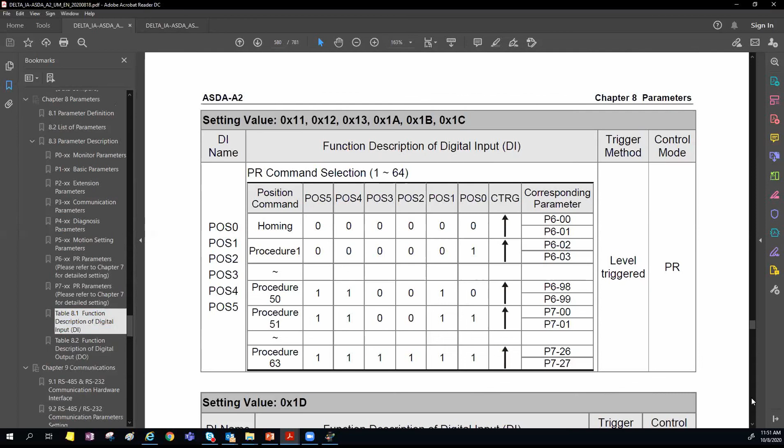So if I go back to the user manual, because I need to know which function code I need for digital inputs, I'll go back to table 8.1, and then the switches for the digital inputs. It's 14 and 15. So it means that if I set 2 digital inputs at function code 14 and 15, and then change the status, like 0,1 or 1,0 or 1,1, I can let them run with the command set I set with these 3 parameters, P1-9, P1-10, P1-11.

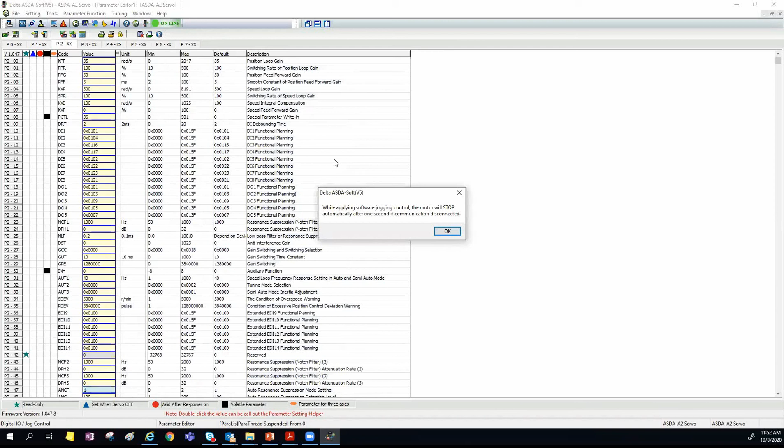But actually using this and changing is not that convenient. So what we can also do is use this digital IO jog control. Just click into it - there's a reminder, just click on OK. And then we have the IO setup page.

First all we need to do is click on this edit DIO item. We click on it, and then we can set which digital input we want to use. So in this case, I will set this as digital input 2, and I'll set it as one of the switch, A contact - not B contact, A contact - and click on OK. And then for DI3, I'll set this as 15, another switch for digital input. And now it's done.

So what will be next is that I can change these two digital inputs' status on or off to run the motor. But the very important thing that first we need to do is servo on the motor. There are quite some terms - you'll hear servo ready, servo enable, servo on, or motor ready. Anyway, the idea is to let the servo drive generate a current to start having control of the motor so that it can react to the command anytime.

So first of all, what we need to do now is control these digital inputs virtually, so we need to tick on these boxes. Now if I click on this servo on, you should hear the magnetizing sound, and once you hear the magnetizing sound, it means the motor is in control. So now as you can see, I am not servo on, I'm not in this status, so I can rotate this motor easily. But now once I servo on, you can see that - I'm not pretending - it's really that I'm not able to rotate this motor that much. This is because the motor is in control.

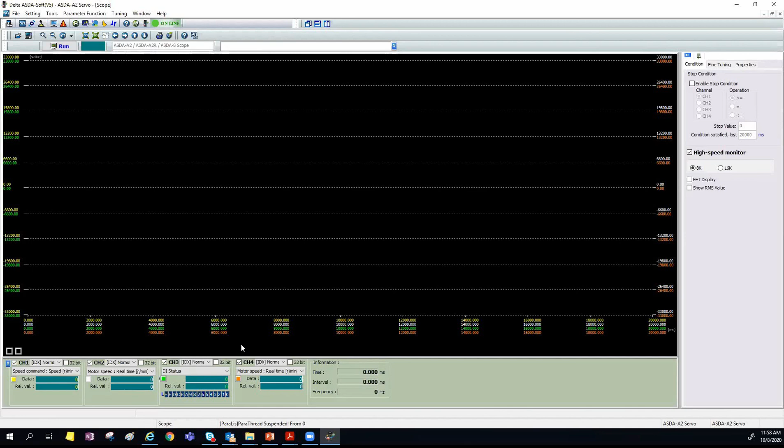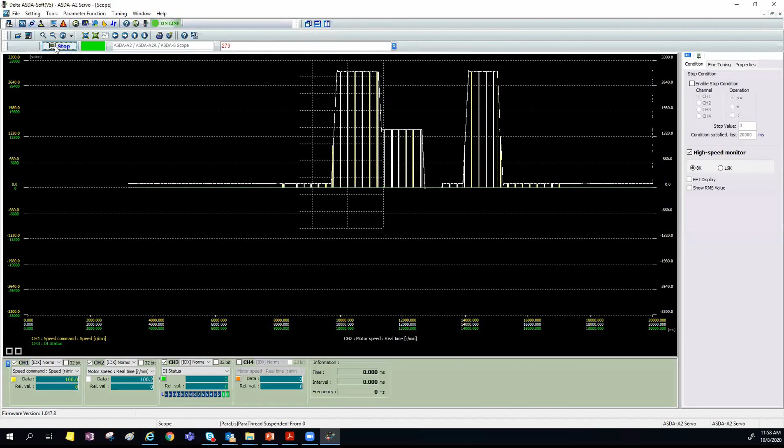And then I will just run the scope, go back, and try to trigger randomly. I'll trigger randomly, then come back to the scope, and then stop it, and I got the signal that I monitored.

For this signal, the scale is not adjusted yet. So what we can do is click on this green icon. We can show all data on screen and adjust the maximum and minimum value automatically. When we click onto it, it will be easier to tell. And then we can click, drag and drop, to zoom in to the area we want to check. But here we'll see an overview.

So the yellow one is the command from the servo drive, and the white one is the actual speed of the motor. The green one is the status - you can see digital input 1, 2, 3, 4.

So let's see here. In this section, when it's servo on, only the first digital input is on, and then only that digital input is on. And then you can see that the speed should be 100, and the actual speed is also around 100.

And if we enable both digital inputs, you can see the speed will go up to 3000. And then if I disable one digital input and only leave one on, you can see the speed will change to 1500. The actual speed is also changing.

And then if I disable all of it, you can see there's no more speed coming, and the motor is stopped. Once I change it, it will also move. So this is a simple test that we can use some registered digital input to run the motor, and we can use the scope to check if the behavior is as expected.

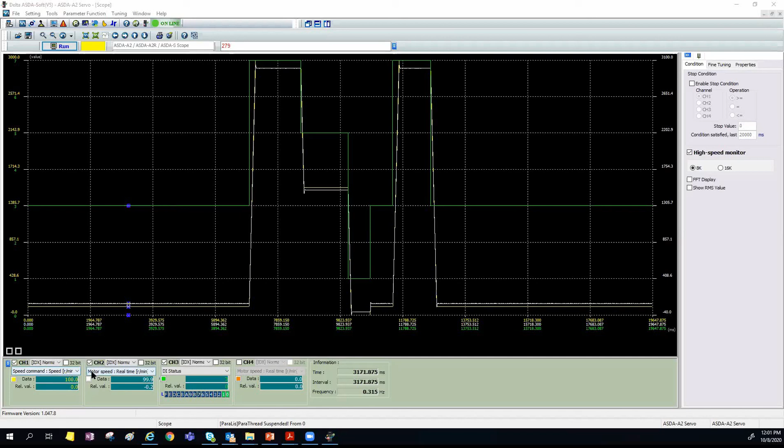So this is one of the data we can check for the command speed and target speed, or the feedback. Also, what we will check sometimes is the command position in pulse user unit, or the feedback position. But in this case, since we're monitoring the position, it's necessary to tick on this 32-bit, otherwise the data will be reset. Then we will not see the line just going up - instead we'll see it going up and then down, being reset, and then up and reset.

So for some basic troubleshooting, what we can do is check the command and feedback position, and also the command and feedback speed.

And then for tuning - why do we need to do the tuning? So tuning basically is to let the servo drive know how much load, what's the mechanism that it's driving. So if we don't know it, maybe the system cannot control the mechanism properly, and then maybe there will be some vibration, noise, or other things that are bad for the performance.

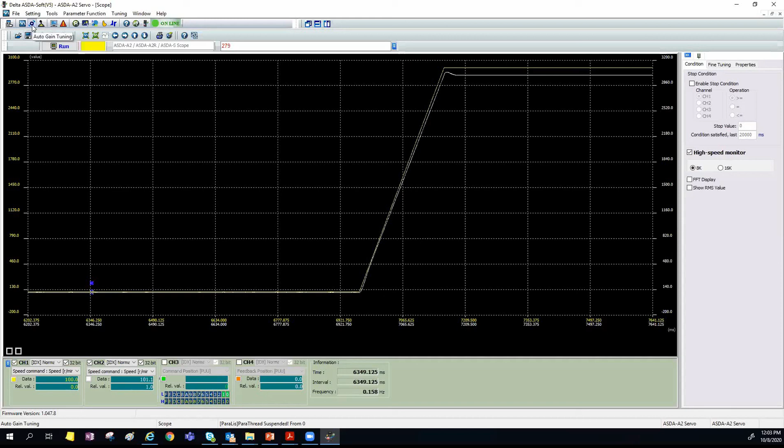So what we're going to do is the tuning with this. Here we have this auto gain tuning, with the gear icon. First, we click into it. For people who are experienced with tuning, you can just follow what you're used to doing.

Okay, here maybe I'll just assume it as 2. And for bandwidth, higher bandwidth means higher responsiveness. But it's not always good to set it too high, especially not for a system when we're not sure how it will respond to the command. So first, maybe I'll set it as a lower value, let's say 40, okay?

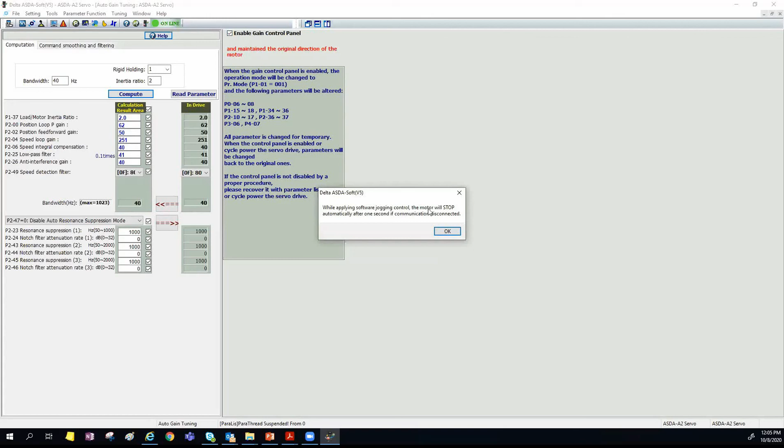Then I'll click on compute. I get these PID control data parameters, and I download them into the servo drive. And then I enable the gain control panel. And then first I need to servo on, okay?

And then the jog speed, I'll set it at 200. Please be noted that the speed cannot be lower than 200, otherwise it's not possible to move it. Okay, then I download it.

Then I use this arrow to move it to a certain place, and I set it as position 1. I move it back to a certain position and set it as position 2. I let the time interval be 500 milliseconds. Then I let it start to run.

You can see that the inertia ratio will start to change. Once you notice that it stops changing a lot and becomes stable, then what you can do is stop. Okay, it's still changing, but I want to say sometimes we'll just stop it anyway. And then this is the estimation I get from the servo drive.

I'll set it to the panel, and then you can see that it also sets the bandwidth, based on this inertia ratio. Then I compute, and then I download it again. Okay, so this is one cycle of the very basic tuning procedure.

But what we can do more, and what will also be better in the actual application, is that we might need to increase the speed. We don't have to increase it to like 3,000 or more, and it's not really necessary to increase to the maximum speed that will be used in the application. But it'll be better to increase a bit because then we can try to trigger the characteristic point of the machine. So maybe this time I'll increase it to 700.

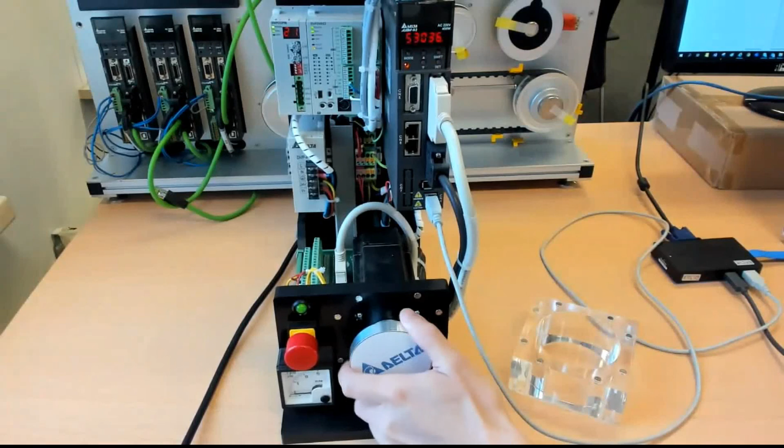You can see that I could not really move the motor. So now, if I servo off first—okay, now I servo off—and if I change the bandwidth to 30, I compute, I download into it, and then I servo on again, you'll see what happens. You can see that the servo drive is still controlling the motor, but I can move it already, okay?

So this is how the bandwidth will affect the servo drive and the motor, because higher bandwidth means the following will be better. So even though we're not giving any command to move the motor, the servo drive is actually commanding the motor to stop at that point, so it's still controlling the motor. With higher bandwidth, it means it can also resist external force better, and that's why when I try to move it, it's not possible. But if I lower the bandwidth, then it will be possible to do it.